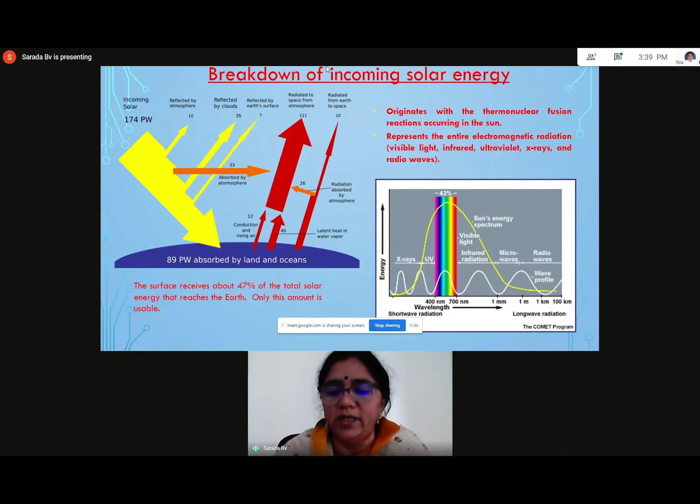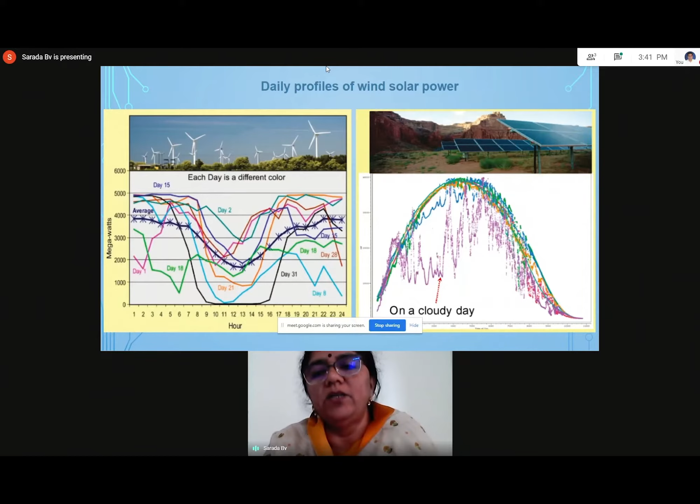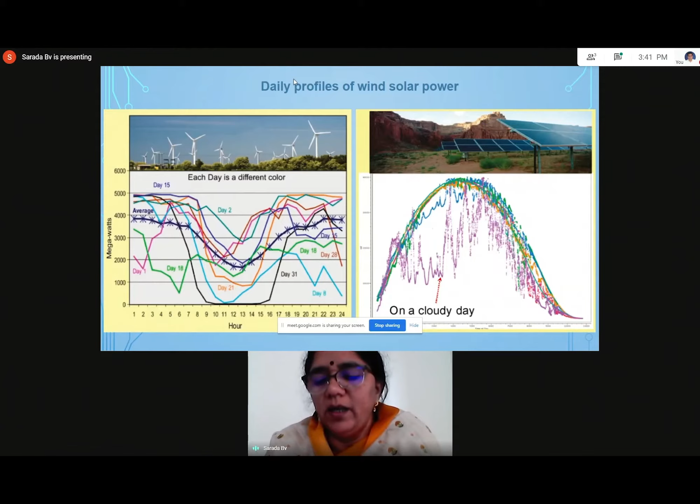And also in case of solar energy, you can see on a cloudy day, the purple color map, there is so much variation. And as I said, it is very low in the morning hours and very low again in the evening hours. So basically in the afternoon, it gives the maximum power. And on a cloudy day, it again gives less, as you can see in this plot. So what is important is this converted energy has to be stored in some form or the other in order to be supplied again for all the applications.

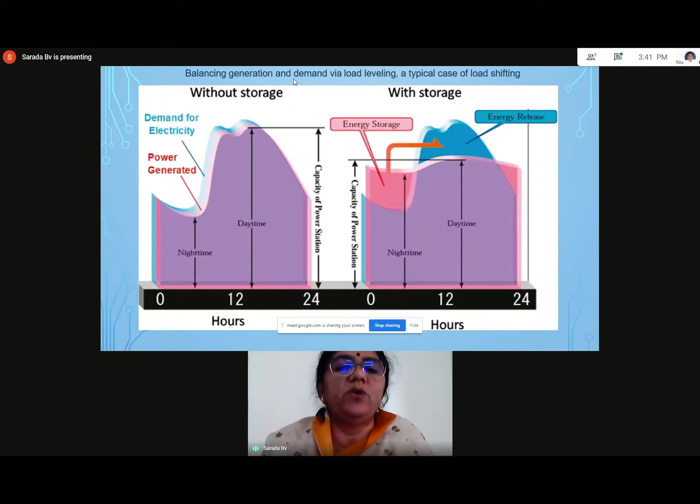So energy storage is very important, especially when renewable energy sources are used for conversion. You can see over here, without the storage system, the power coming out is very huge during the day, and very low, almost none, at night. Whereas when you have an energy storage system, what is generated during the middle of the day can be distributed to the night time, and this should give proper electricity.

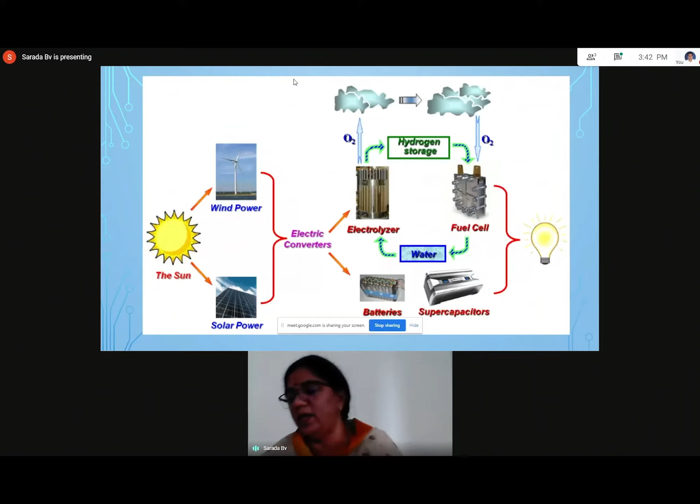And how do you convert this solar, and how do you store this electrical energy? There are different ways of storing it, by electrolyzer or fuel cells as hydrogen storage, and most widely used are batteries and supercapacitors. So in the morning, you have heard a lecture on batteries, especially lithium ion batteries, which are most widely used both for grid applications and also for the automotive applications.

In addition, all of us are using batteries. All these mobile phones consist of lithium ion batteries. And we should know one thing, that all these lithium ion batteries are only imported or at the most assembled in India. None of these are made in India. So we are right now putting efforts at ARCI to make materials and also the cell assemblies as indigenous technology for the society. And another technology is supercapacitors, which I'll be speaking about a little later.

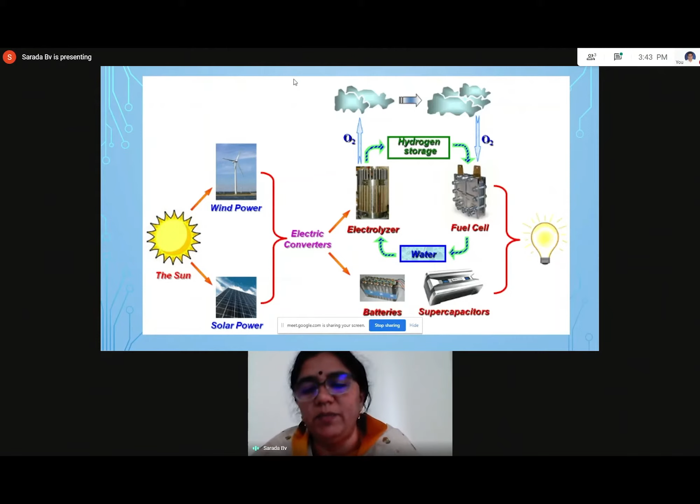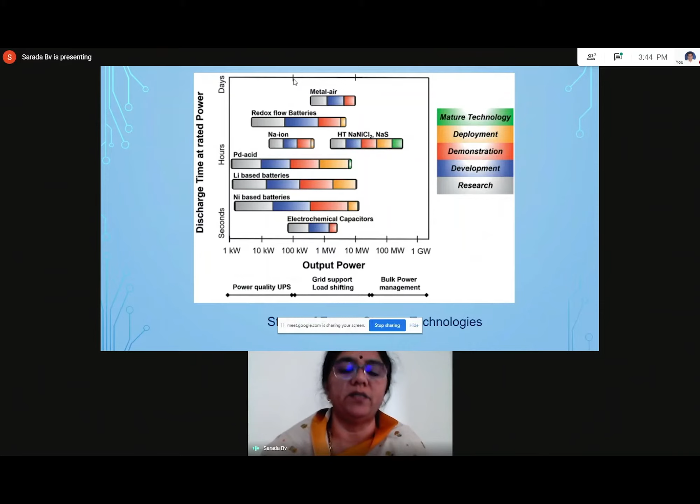So the most wanted battery right now is the lithium ion battery. I will not be touching more on lithium ion battery because you have already heard about it in the morning. And the future batteries beyond lithium ion batteries are lithium sulfur batteries, sodium ion batteries, sodium sulfur batteries, and supercapacitors.

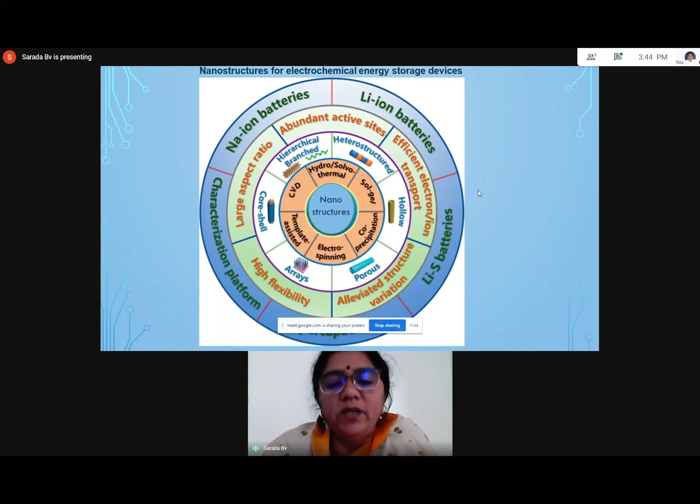Now, as mentioned in my title, nanostructures are very, very important for almost all the applications, and especially the energy storage applications. Also, the conversion applications require the nanostructured materials. And the advantages you can see in this diagram. They give abundant active sites, efficient ion transport, alleviated structure variation, etc. And you can make nanostructures into different forms, and you will be surprised to know that each form of these nanostructures gives different types of outputs. And this is just a gist of all the anodes and cathodes used in the lithium-ion batteries.

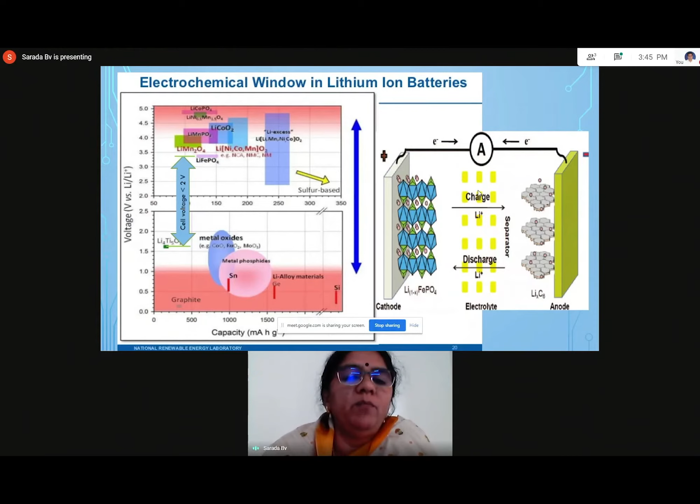And you all know that last year the Nobel Prize in Chemistry was given to the inventors of lithium-ion batteries. Although it started many decades ago, now it has become a mature technology and it has got the Nobel Prize. And Professor John Goodenough, at the age of 97, received the Nobel Prize for lithium-ion batteries.

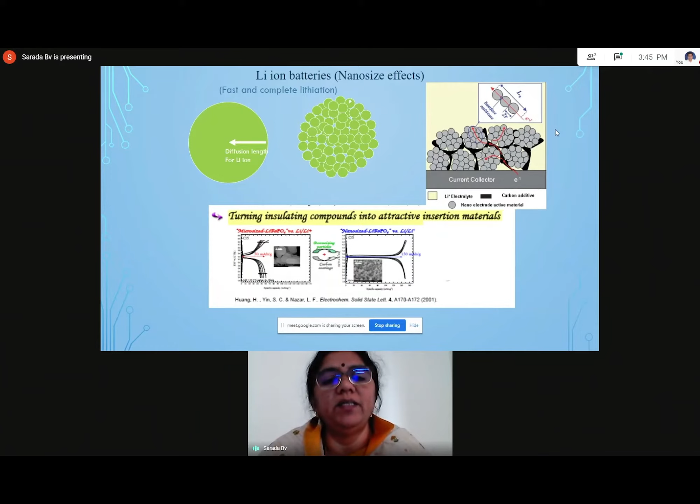And as I mentioned, nanosize affects the performance of lithium-ion batteries. You can see over here, the diffusion length for lithium-ion is very, very important for the fast charge discharge process. When the material is nanostructured, these become very small, and that improves the performance of the lithium ion batteries. And similar is the lithium sulfur battery.

Now, why is the lithium sulfur battery very important? When you are using both anode and cathode as lithium composites, it becomes very expensive, and also the performance is lower. In order to improve the energy density and power density, we can go for lithium sulfur batteries, which are at research level and soon going to become a technology. You can see over here, the theoretical capacity is 1675 milliamp hour per gram, and the energy density is about 2500 watt hour per kg for lithium sulfur batteries.

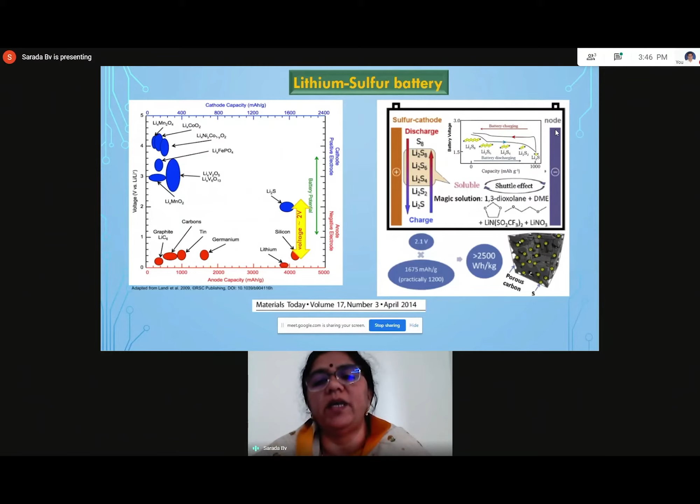But practically, the problem is during the discharge, several intermediate polysulfides are formed during the lithiation, that is the discharge process, at different potentials, and they get dissolved into the electrolyte, and ultimately for the second cycle there is a big decrease in the output. This is called the shuttle effect. In order to decrease this, you have to engineer. You already know sulfur is a good cathode, and that it is facing these problems. So the next important part is to engineer the cathode.

So to engineer the cathode part, you have to choose the substrate and also the sulfur nanoparticles in such a way that you can bring out best performance. And for that, we have used electrodeposition methods. Of course, several methods are used. However, people are finding that these methods are giving best performance in the first few cycles, but it is fading with each cycle.

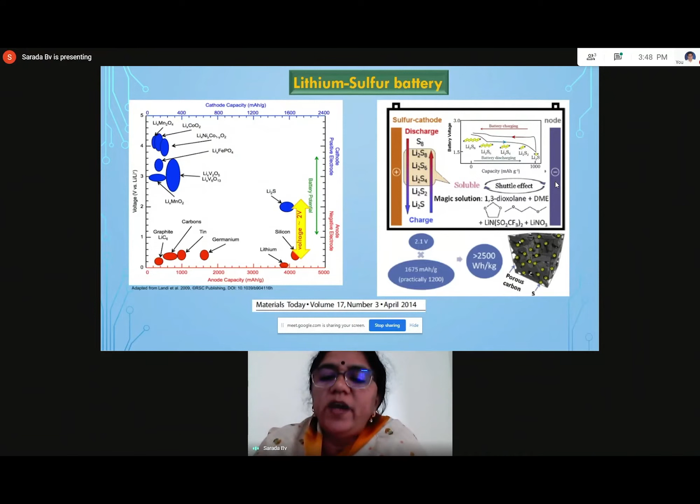So in order to improve the performance, we have to come to a particular process. For any technology, the process for making these nanomaterials or filling the nanostructures is very, very important. And among the other methods, the electrodeposition process, which I have been working on for probably the last two decades, is a very viable method. It is cost effective and also has plenty of parameters that can be changed just at normal ambient laboratory conditions.

All of us have studied in intermediate itself: electrodeposition is nothing but you put an anode and a cathode and an electrolyte with the salt of the metal that is to be deposited. And if you apply some external electricity, the metal gets deposited onto the cathode. However, in order to get these nanostructures and also to get exactly what loading you want, you can modify this technique using pulsed electrodeposition and pulse reverse electrodeposition.

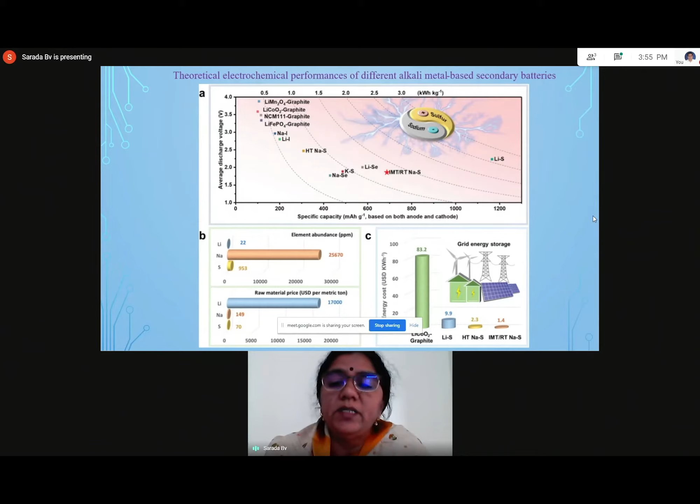Of course, sodium sulfur batteries have been used for almost 2 decades. They are already commercialized and widely used. NGK, a company from Japan, has commercialized them, mainly for grid applications. Lithium ion and lithium sulfur batteries can be used for automotive and other portable, smaller scale applications, whereas sodium sulfur batteries can be used for grid applications, all the stationary applications.

The most important advantage of sodium sulfur battery is that sodium is highly abundant on Earth and very low cost. You can see in these graphs that the cost of sodium metal is very low compared to that of lithium, and the cost of sulfur is also very low, whereas the abundance of sodium is much higher than that of lithium. And since many groups and companies are working with lithium ion and lithium sulfur batteries, a day will come when there will be a deficiency of lithium.

In the case of India especially, the main problem is that we have to import lithium. We do not have sources of lithium in India, and we have to import from other countries, which makes the technology very expensive. So we have to find a way to make our own indigenous technology, and with sodium and sulfur available in India, we can go ahead with sodium sulfur battery technology.

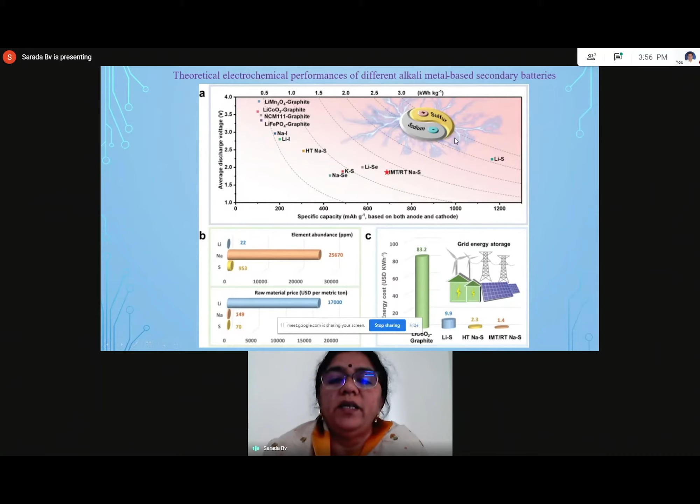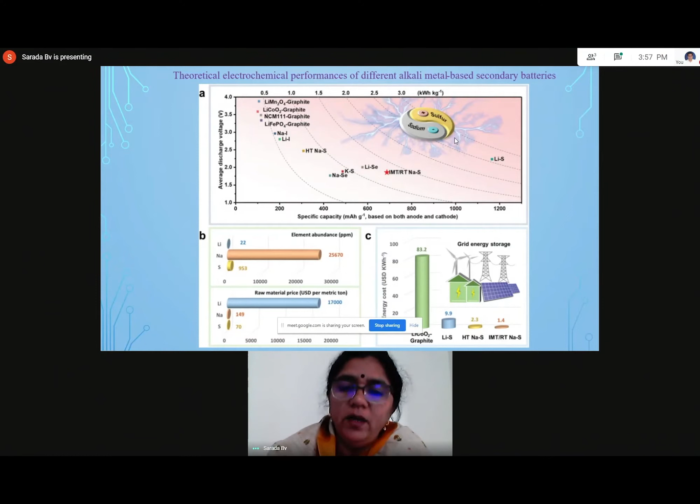But the problem with the high temperature sodium sulfur battery is that it is operated at 300 degrees Celsius, and it has many problems because of operation at high temperature, and the cost effectiveness is very low, although it is very stable. So now we have to find how to minimize the cost of making sodium sulfur batteries. The operation of the sodium sulfur battery involves the anode and cathode.

High temperature sodium sulfur batteries use the anode and cathode in the form of molten liquid, with a solid electrolyte of beta alumina between the two, and sodium ions diffuse back and forth during the discharge and charge process. Another problem with these high temperature batteries is that they produce plenty of polysulfides, as in lithium sulfur batteries. These high order sodium polysulfides, formed during discharge, deteriorate the performance of sodium by forming dendritic structures, and this has to be controlled by using a proper anode and sulfur cathode.

So as in lithium sulfur batteries, here also you have to take proper care of sulfur as the cathode, and we also need to find more types of anodes for sodium sulfur batteries. These are the challenges for room temperature sodium sulfur batteries: low conductivity of electrolyte and electrode, the shuttle mechanism, formation of polysulfides and their dissolution into the electrolytes, which causes most of the problems, and dendrite formation at the anode.

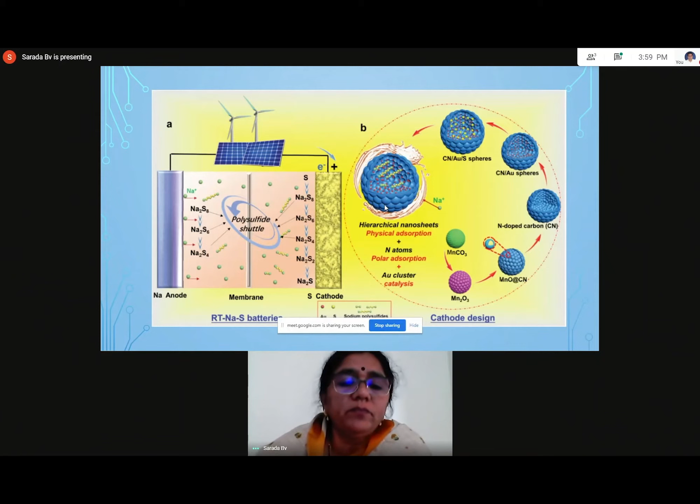And these are all the other minor problems with the sodium sulfur batteries. So now we have very recently started working on, so this is again a future technology, sodium sulfur batteries. Right now we are working on the sulfur incorporation into the porous structures, and also using other oxides so that it can give a better performance. And also the anode part.

So in case of sodium sulfur batteries, mainly sodium ingots are used as anodes. But as I said, with very few number of cycles, the dissolution of these polysulfides, forming polysulfides along with sodium, and also forming dendrites of sodium at the interface decreases the performance of the battery. And in order to decrease that, you can use the alloys of sodium antimony, sodium tin antimony alloys, so that this problem will be solved.

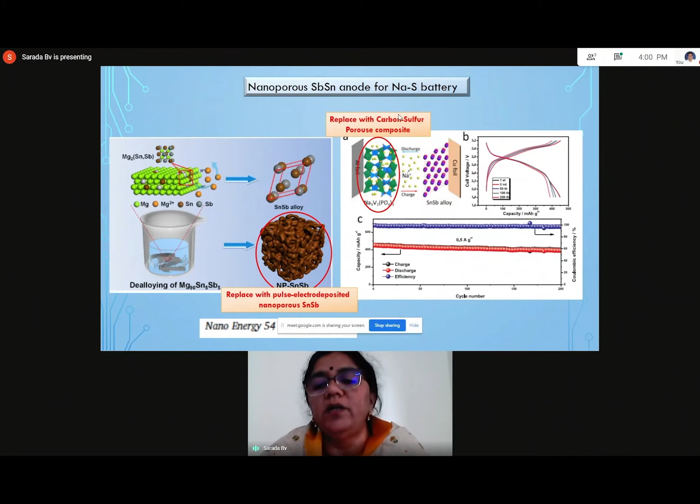And so here you can see this is the anode that can be prepared. This is the futuristic battery. You can make a porous tin antimony structure and introduce sodium into this to be used as anode, and also you can use mesoporous carbon and microporous carbon structures to introduce sufficient loading of sulfur into these carbon structures in order to get the best performance of the sodium sulfur batteries. And we have already started working on the nanostructured carbon to introduce the sulfur into these structures.

And the other form of energy storage devices using high power nanomaterials is the application for supercapacitors. So the main difference between the batteries and supercapacitors is that in batteries, the energy density is high, whereas power density is low. Whereas in supercapacitors, the energy density is low. It has very high power density. So it very quickly charges and discharges.

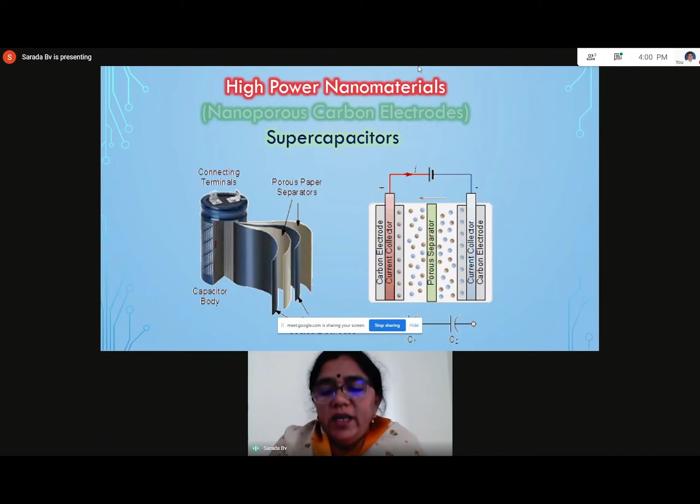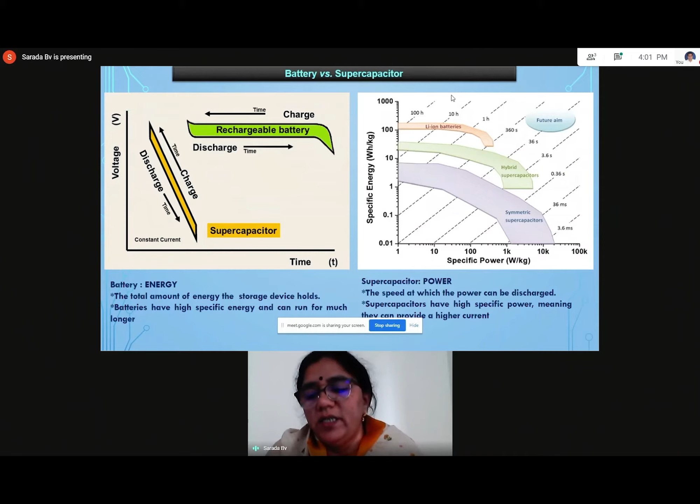So now on the right side, you can see the plot where it shows the specific energy and specific power of lithium-ion battery and symmetric and hybrid supercapacitors. You can see over here that the symmetric supercapacitors show highest power and lowest energy density. And in order to maintain both energy density and power density, you can make use of pseudocapacitors, which are the latest addition to the supercapacitor family.

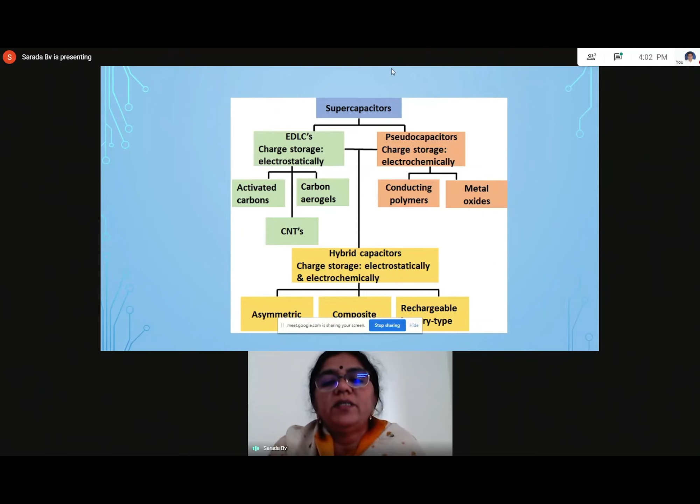So the supercapacitors are now of two types. One is EDLC, which is the commonly used supercapacitor, and the latest addition is the pseudocapacitor, where metal oxides are used in order to have some Faradaic reaction. So here the charge storage in the EDLC is only electrostatic, whereas in case of pseudocapacitors, it is an electrochemical charge storage technique.

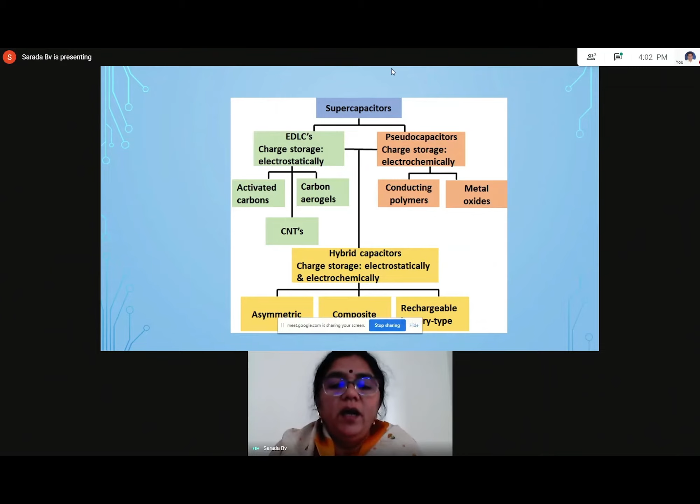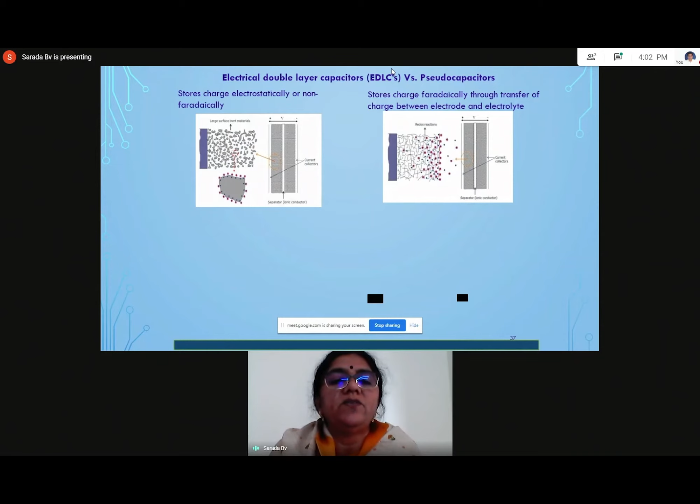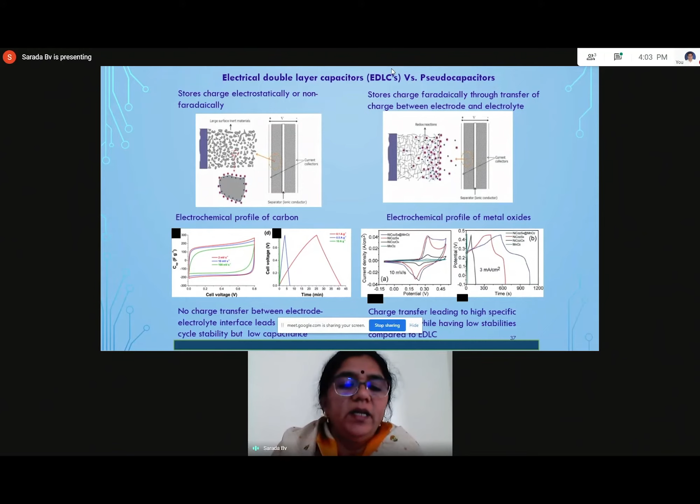In EDLC, we use mostly the activated carbon, porous carbons, etc. Whereas in pseudocapacitors, you can use most of the metal oxides, conducting polymers, etc. And the hybrid capacitors can be made as combinations of both these supercapacitors. Now, as I just mentioned, the charge storage in EDLC is just electrostatic, whereas you can see over here that because of the redox couple that is formed, or oxidation reduction reactions, the capacitance enormously increases, which also helps in increasing the energy density of these capacitor systems.

So these are all the different types of capacitors, and as I already mentioned, it can be used in transport like city buses, where every 2 or 3 kilometers there is a bus stop, and while the passengers get out and get in, it can be charged in a few seconds and can run for those 3-4 kilometers. And several countries are already using these supercapacitors.

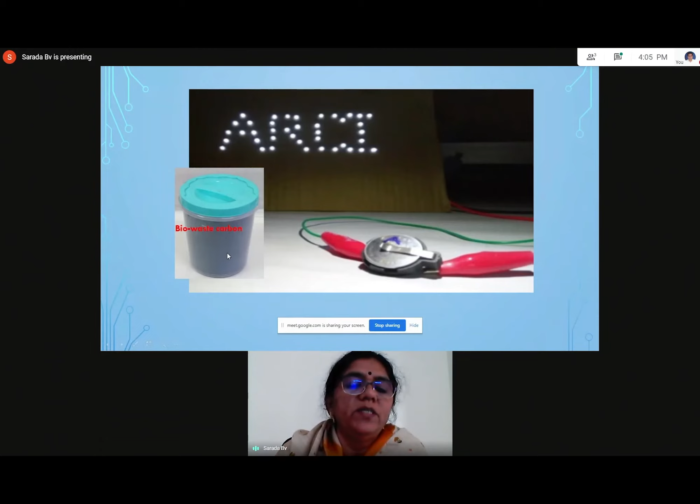And EDLC capacitor is made by using this carbon substrate, and you can see over here, from the carbon made from the biowaste, the performance is much better even compared to the commercial ones available. And this is demonstrated at lab scale, and you can see that kilograms of this carbon could be made, and so that's how it is upscaled, which is in line with the mandate of ARCI.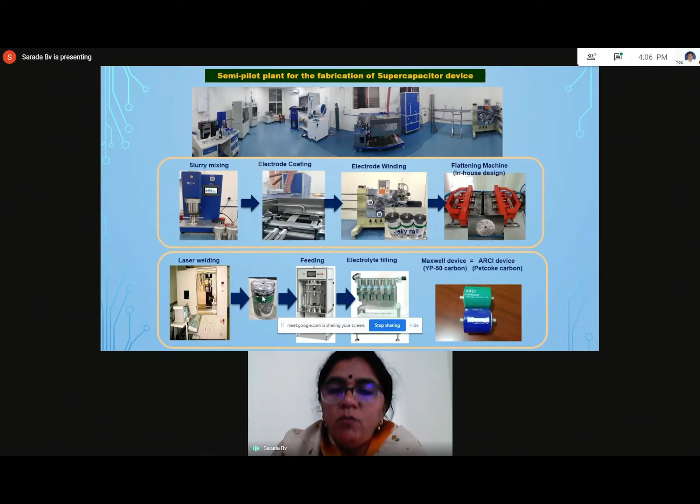And so now moving on to the next part of the supercapacitors. Pseudocapacitors, as I said, are gaining importance recently, and just with one material, Maxwell has already commercialized these pseudocapacitors. And as I said, the advantage of these pseudocapacitors is that they give very high energy density compared to that of EDLC because of the small amount of nanostructured metal oxide that is deposited on porous carbon. Again, we have used electrodeposition for the preparation of these nanostructures.

And in addition, this work is done by Ms. Samhita. Again, I'm proud to say that she is also an alumni of Anantapur campus, and she is doing PhD with me. She is registered at IIT Hyderabad. Of course, she is a research scholar at ARCI, and she is working under me.

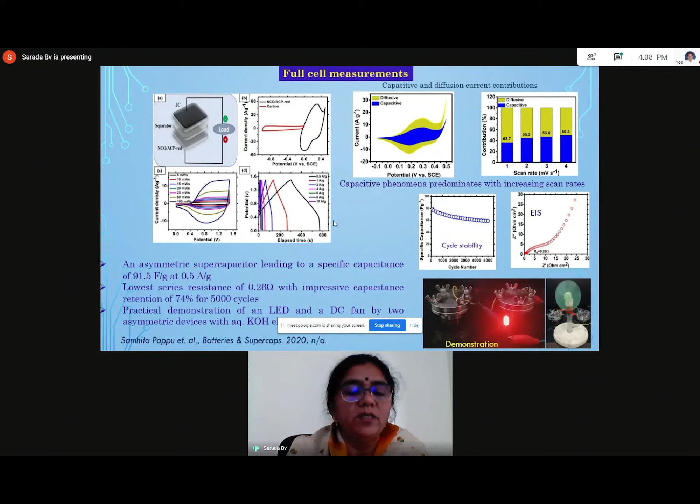And with these encouraging results, she has made a full cell by using the previous carbon that I was mentioning, that is made from the waste jute sticks. And you can see over here, this asymmetric capacitor with the increase in the potential window has shown a very good performance and cycle stability. And a coin cell is made by using this pseudocapacitor, and she could light an LED and also run a fan for several seconds. And as you can see over here, the cycle stability is very good. And we are now in the process of upscaling this process, and this is recently published in Batteries and Supercaps by her.

And next most important material: as I said, Maxwell has commercialized only one type of pseudocapacitor by using MnO2 based electrode material. And so here it's made as an asymmetric supercapacitor by Maxwell. On one side an activated carbon material is used, and the other electrode is the MnO2 carbon composite.

Again, I was mentioning that you can improve the quality of deposition by using pulsed electrodeposition. However, in some of the processes, direct current deposition performs better, especially when you need very good porous nanostructures, because a very high current is being given continuously. You can make nanostructures where during the deposition the hydrogen bubbles are formed, or in anodic deposition the oxygen bubbles are formed, and these create the nanostructures, sitting for a few seconds, and they escape after the deposition and leave the nanostructures.

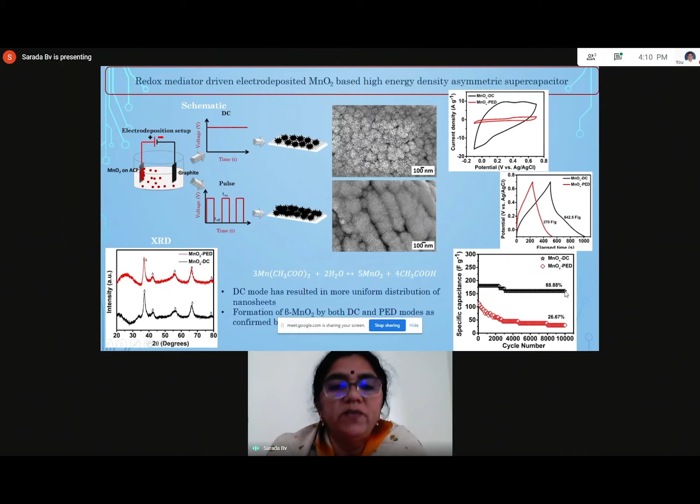And now again we have made the full cell by using commercial carbon electrode as the negative electrode and as the counter electrode, and MnO2 prepared by direct current deposition as the main working electrode. And you can see over here that the performance is very good.

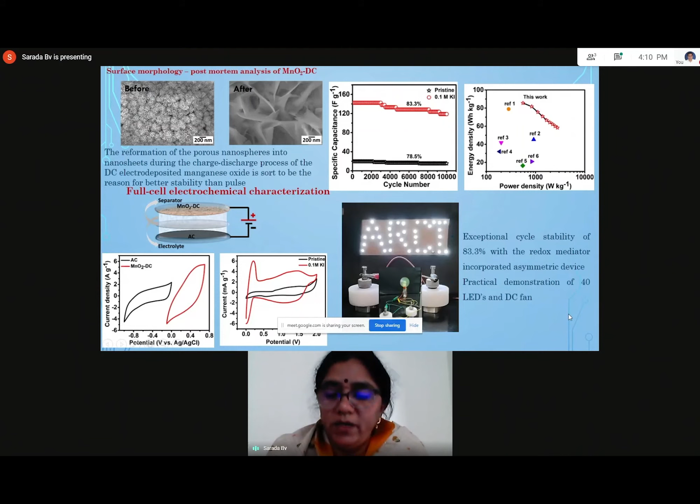And this is the Ragone plot that is showing the comparison of our present work compared to the reported work, and it is very good compared to the reported ones. And this we are soon going to submit for publication. And again, a coin cell is made and tested for lighting a lamp. And this is the data I was mentioning previously with our results.

And finally, previously what we have used is one carbon electrode and one metal oxide electrode and prepared an asymmetric capacitor. And now here, a step further she has gone and prepared an all electrodeposited, all metal oxide or metal sulfide, metal composite based pseudocapacitor by using nickel cobalt sulfide as one electrode and iron oxide as the other electrode in order to further improve the performance of this asymmetric pseudocapacitor.

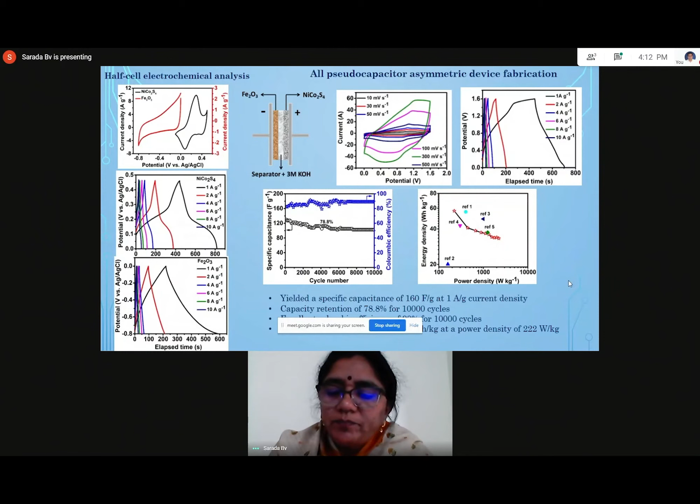And with the respected Vice Chancellor speaking about the COVID-19 application: we are working in a particular field, but when necessity comes, we have to slightly tune to the requirements of the country, the city and the place around us. So we have quickly worked on UVC-based technologies for fighting against COVID-19. During the lockdown in the month of April, we designed these three apparatus, a trolley for medical applications.

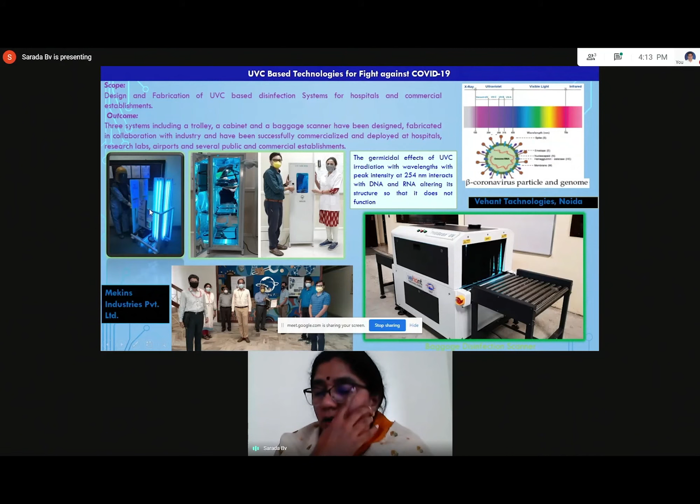This has been made possible by collaborating with University of Hyderabad and Mekins Industries, which is based in Hyderabad. And this is now used in several hospitals. The performance testing for COVID-19 is done at ESI at Hyderabad.

And this is another, the cabinet for laboratories and also for hospitals, where within a few minutes they can disinfect the lab coats, the batteries, and the small accessories students use in the laboratory, so they can be used by the other researchers.

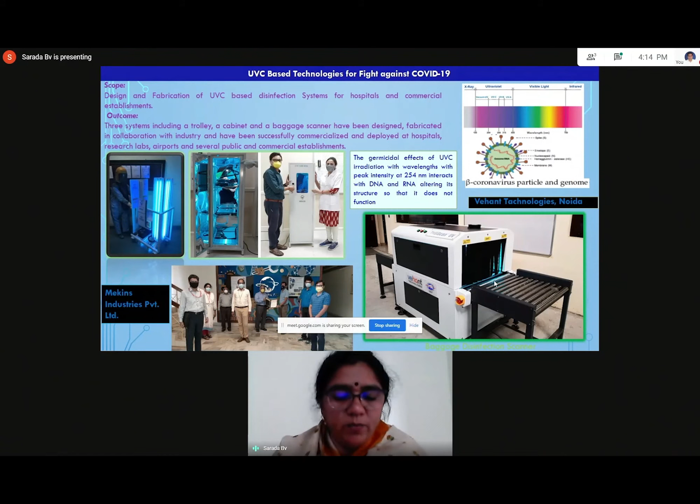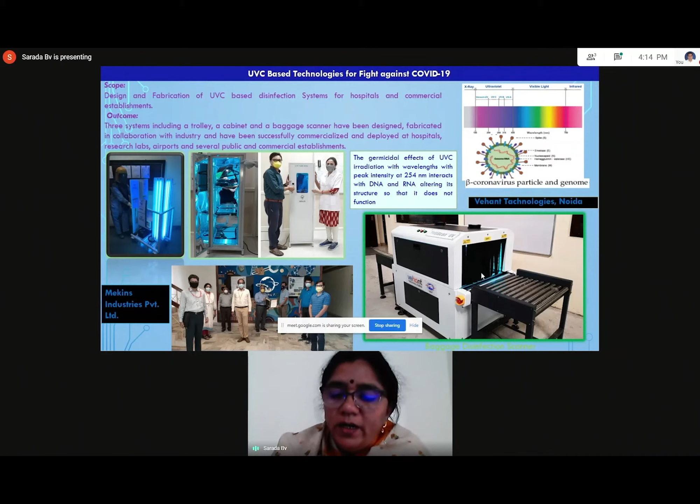And the latest one is a conveyor for baggage disinfection, which can be used in airports and commercial complexes. This we have made in collaboration with Vehant Technologies, based in Noida, and they have already exported this product to different countries, and it is being used for disinfection of COVID-19 at commercial places and at airports.

And another one, related to chemistry, we have quickly made a liquid that can be used for disinfecting surfaces. Of course, you all must have read in the news that sodium hypochlorite is used, and several chambers are kept all over the market at the entrances. However, it is found that sodium hypochlorite is very toxic for human beings and the skin.

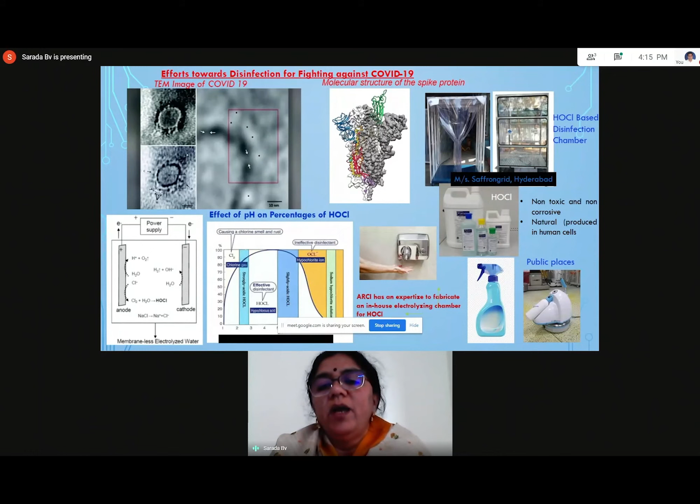What we have made is hypochlorous acid, which is useful in killing viruses and bacteria, but is very friendly to human skin and our lungs, because it is used at only 200 ppm level. And again, we collaborated with industry and quickly made and commercialized it. So these are the works we have done during the lockdown period, when we could not directly work in the labs. And during this period itself, we got a nanomission project in collaboration with CCMB and Resil Chemicals.

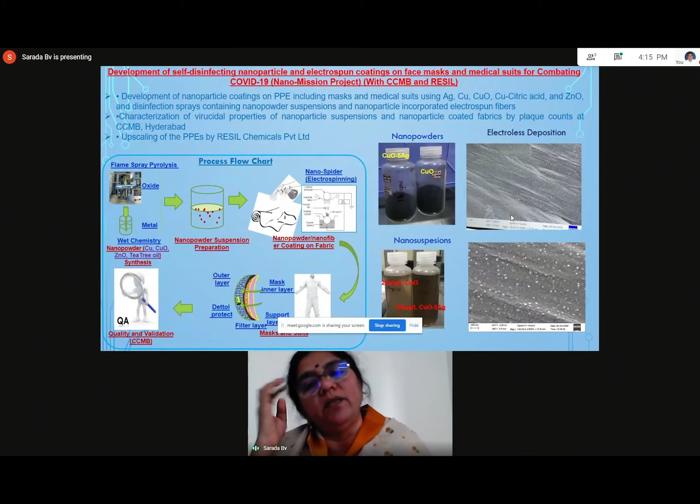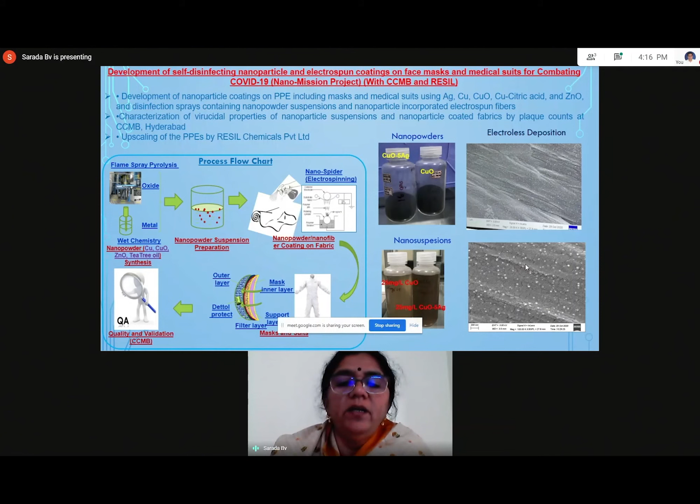We are working in order to make masks by electroless deposition of copper and silver onto masks and PPEs for the use of, again, the general public, and also mainly for the doctors and medical practitioners who need not use a different mask every few hours. So then, since there was a lot of discussion on biomedical applications, I'm just introducing 2 or 3 slides for you.

What Dr. Jitendra Kumar Sharma was speaking is that we do not have many technologies. We are importing almost all the technologies from abroad and using it in India, although the necessity in India for biomedical applications is very, very high. So a year ago, we started working on a few of the biodegradable and normal implants.

Here, this is a biodegradable implant which can be used either as a stent or as a screw, which slowly dissolves in the body itself, because some of the medically coated stents need not be used for several years, and also some of the small screws and small plates where there is a small problem in the bone can be slowly dissolved into the body itself, with which we can avoid the second surgery and also stay safe. So now we have to use bio-friendly materials for these, and we are working on iron manganese alloys as biodegradable implants, and this is in the process.

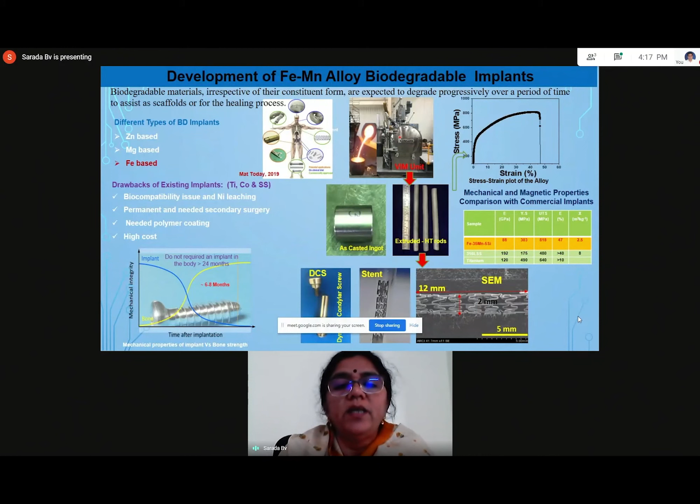And the other one, we have started working with Sri Chitra Tirunal Institute of Medical Technology, is again for the stents. They have submitted the tubes, which by using the laser cutting technology, laser machining technology, we could make into the stent shape. And the problem immediately after the machining is that the edges are very sharp, so we cannot introduce this into the body directly. So now what we have done is we have used the electrodeposition method, anodization or electro-polishing method to make it.

And the other one is, the generally used stents are made of cobalt chromium alloy. However, sometimes in some people it creates problems by corrosion. So a coating of TiN is made on these cobalt chromium stents. Again, this was asked by Sri Chitra Tirunal, and we have done the coating. ARCI is known for different materials technologies, including coating, powder metallurgy, and non-vacuum methods of coatings. And we have done this and supplied about 12 stents to Sri Chitra Tirunal Institute, where they are doing the animal test now, and they expect that the results will be coming out soon.

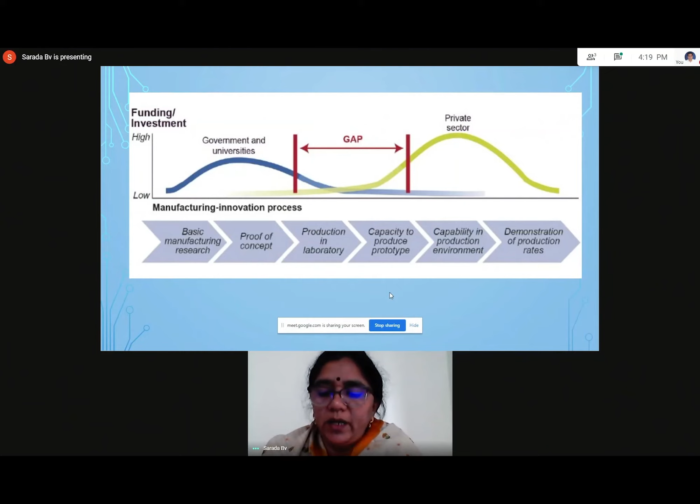So we have started working even in this field, which is of utmost importance for Indian society. And as I mentioned in the beginning, the government labs or universities have to start with an innovation, and the gap between the invention and innovation should not die down in the middle, and it has to come into technology. So for this we are working, all of us at ARCI, and these are the two groups which I mentioned in the beginning.